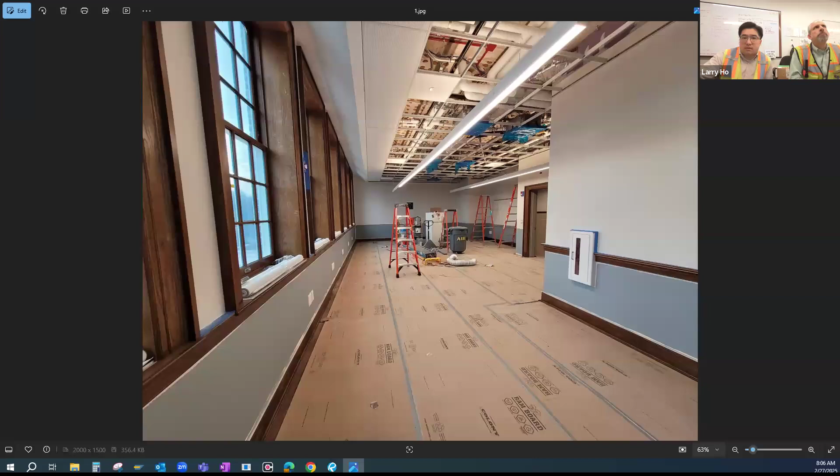Can everybody see the screen now? Yes, okay. So we're up and downstairs. Upstairs is kind of status quo, to Ty's point right now. We're just getting ready to start peeling back the protection and cleaning ourselves up upstairs, so we're not going to see any photos of the upstairs. The only change up there is that we've begun installing the ceiling tiles. We walked last Friday with the building officials, and we've agreed that we can start closing up tiles as we continue our commissioning effort throughout the building.

So we're going to look at the main and lower level outside as the main focus now. This is the conference room on the main level, the north conference room. Basically the wood trim is getting finished up, and the window treatments are getting ready to get installed. You can see them sitting on the windowsills as we're getting ready to install those. Again, we're maintaining the protection for today. Protection is going to start coming up tomorrow.

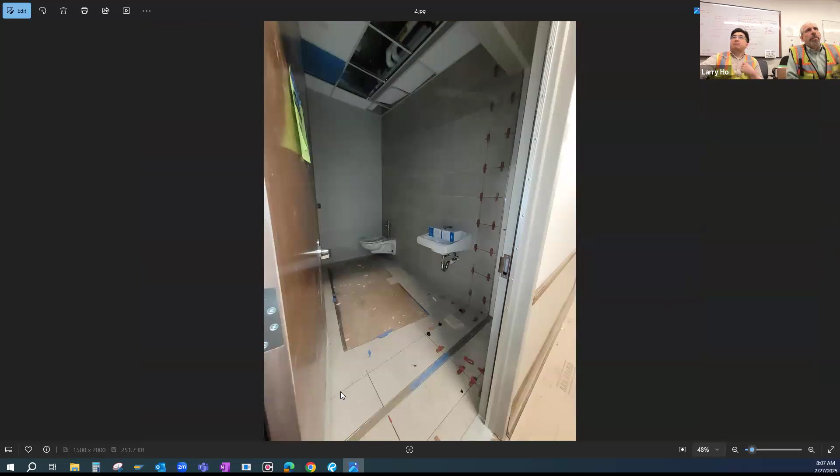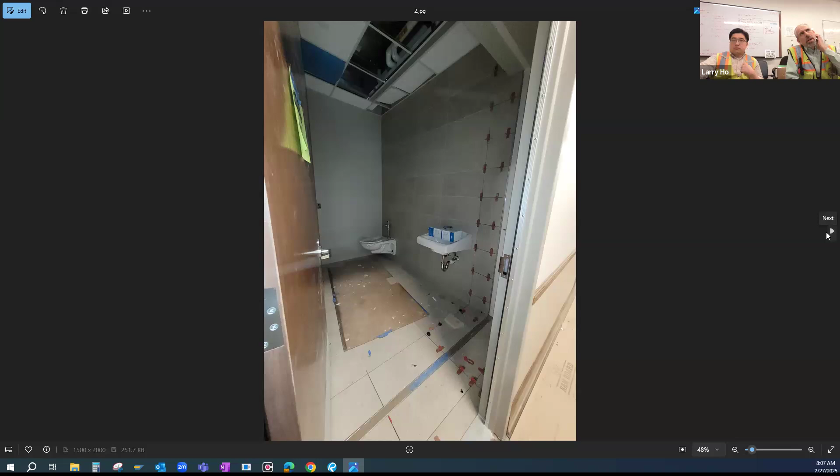This is the bathroom on the main level. We were able to manipulate a little with the expansion joints in between the two buildings, and we're able to get that all in place. That allowed us to finish up the tile, and so they're just putting the fixtures in on the main level with a little bit of grouting to do.

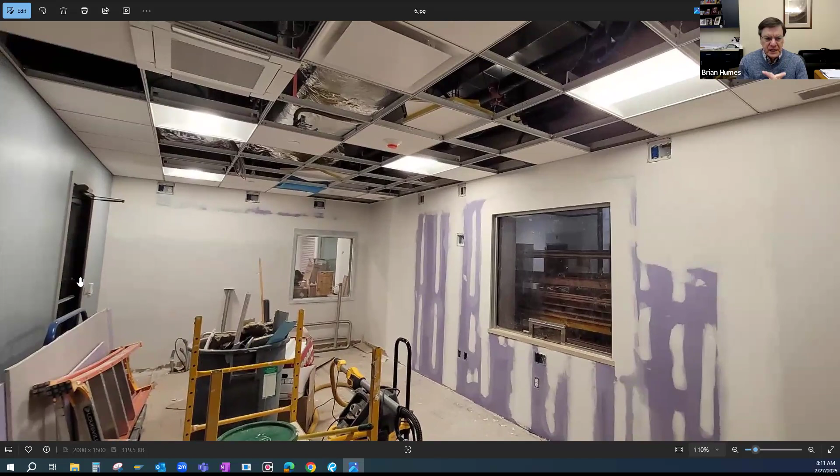We are taking the 2 aluminum doors that you see on the left side. We're taking those aluminum doors and frames out. We're replacing them with new metal frames, solid wood doors, but the dispatch side of those 2 doors will get the same wood trim as you see in the lobby.

So if you're in the lobby looking into dispatch, you'll see some wood trim into dispatch, but it's really the two doors was all. And was there anything else that we changed?

We did add some more data outlets in the room behind dispatch, that work area behind dispatch.

And did we keep or did we change the casework that was in this area? Because I know we had talked about that. There was casework that had been eliminated at the window.

We eliminated that so officers could go up to the window and the console furniture could get placed back where it wants to.

So the casework was what was deleted in this space. Brian, is there anything else we have to do so that people working in dispatch feel like they're getting a building that's as fresh and new as the rest of the police force? It will be as new: new flooring, new paint, new monitor locations. That's been coordinated with the police department. They're going to get the existing consoles back into this space, but that's the only thing coming back, the console furniture.

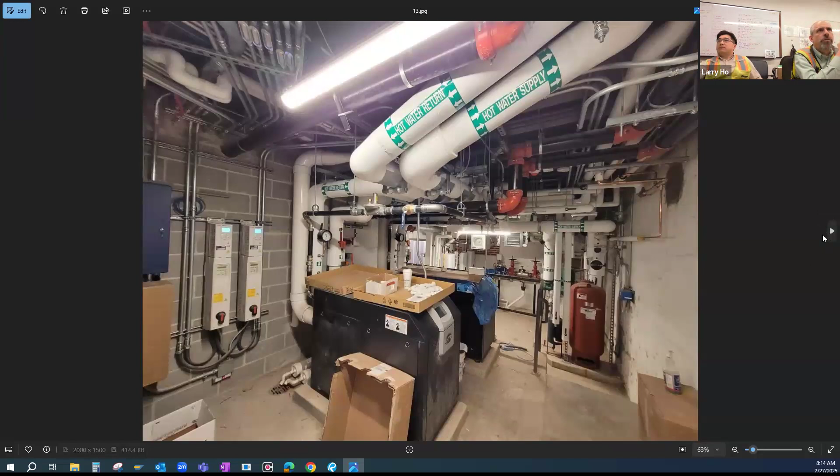The boiler room, as we're starting to neaten it up - those are the controls, the variable frequency drives, expansion tanks, boiler stuff. It's kind of back of house, but the guys did a great job. The craftsmen really took their time in here, and I wanted to show off putting 10 pounds in a 5-pound bag. So they did a great job there.

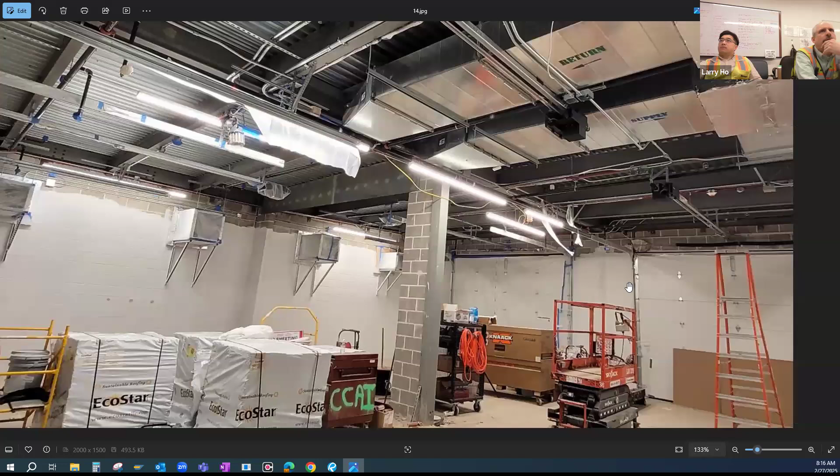And then the last little bit of ceiling and roof shingles - you can see we're down to the wire with the roof shingles, the piles are getting smaller. With the weather getting better we can get the shingles done. But everything from the exhaust fans you see in the back to the louvers, and the louvers on the right hand side for the doors - we're all ready to go there.

It was a little bit of back and forth with manufacturer challenges and trade contractor challenges, but we'll get that in time, and everybody will have that up and running.

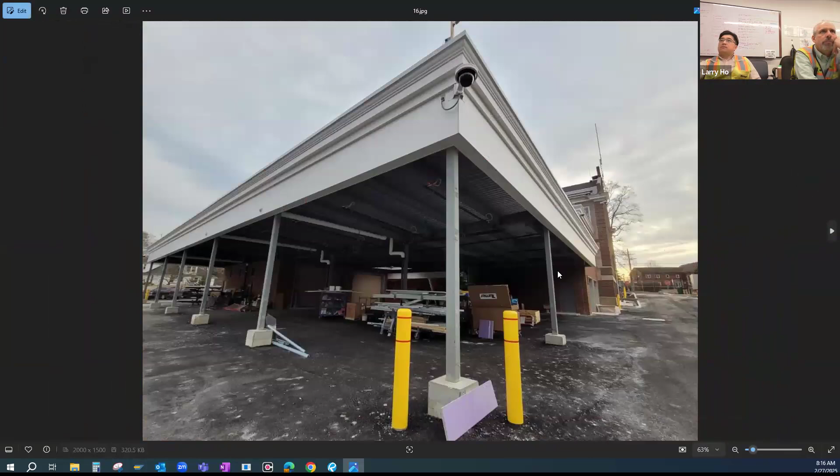The generator was started up yesterday, so it's fully functioning now. We've got one last little bit for the transfer switch ASCO team to come in and do the electrical side of it, now that we've started the generator up and ran it through its paces for 4 hours. They have a load bank that they bring out to test it, stressing the generator to its limits to make sure it's going to function when the load is on.

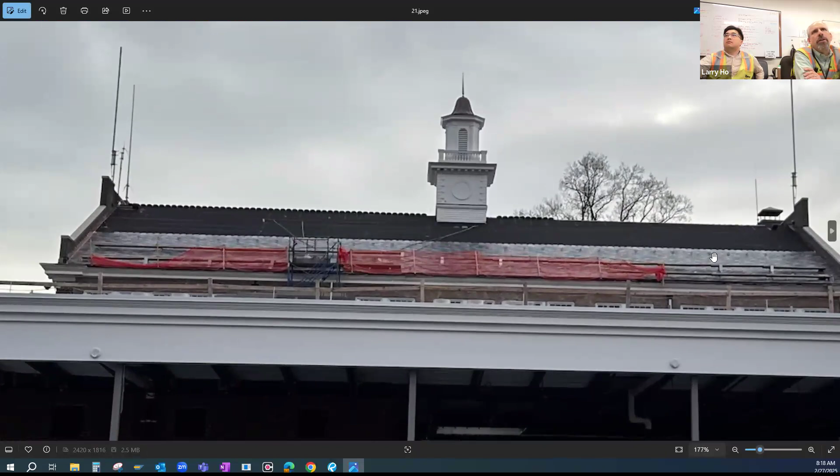From the back of the building, again, up the stairs, retaining wall, and in a little view you can kind of see where they are with the roofing. They've got about another 2, maybe 3 days to get to the top, then they'll finish the capping and wrap up the roof. So a lot of good things going on. The good weather has been helping us a little bit; the rain pokes us in the eye, but other than that, we're in good shape.

Railings are expected to come out next week for the stairs, so we'll close those up. Those were galvanized and had to go to the galvanizer, and there's a long wait on those items. But other than that, once the thaw comes, we can get back and finish up the grading, finish up the planting, etc. when springtime comes.

Looks darn good. Yeah, it looks amazing. Yeah, really does. I wonder if we could paint the clock face — we'll be right twice a day. We can, what time do you want it to say? You just got to pick a time. That's 5 o'clock, right? 5 o'clock somewhere, right?

Hey, we're gonna discuss this later, those columns you showed there, Larry — I mean, Scott. Yep, the dressing, whatever you call that. Right, so if you can look at — I apologize — you can see those are the columns there. There's the 1, 2, this might be a better view there, but you can see them, yeah, the 1, 2, 3, 4, 5, 6, and then the one 7, returns 7. But I don't know if you want to, Brian, take it.

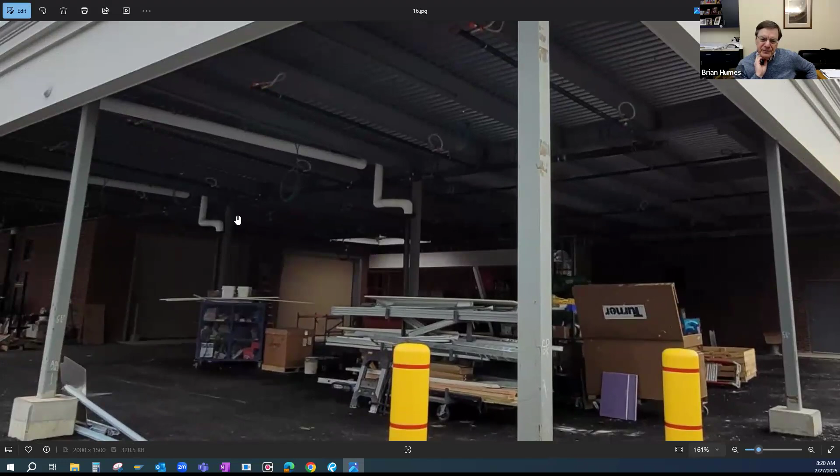We have a total of 9 columns, but 7 of them are on the perimeter, and there are 2 interior columns. The 2 interior columns you can see there have roof drainage that goes down next to them; they're interior to the space. We're going to call for those 2 interior columns to be painted and remain exposed. But the 7 on the perimeter, we've put together a sketch to add column wraps to those, and we picked a solution that I would have picked if we'd started this from the beginning. It's a Tuscan column — I can share with you what it looks like.

So Larry, you're gonna have to jump off.

As far as type of column, I would recommend, and I recommended this, the Tuscan, the second one in. It's a smooth face, it's round. It does have an appropriate curve to it.

These come in halves. They're made out of a fiberglass resin, so they're durable. They're lightweight, but they are just a covering to the structural steel. So they come in halves. You set them on the concrete base, you fasten them together, and then you bondo the seams and you paint them. So it'll be a durable product.

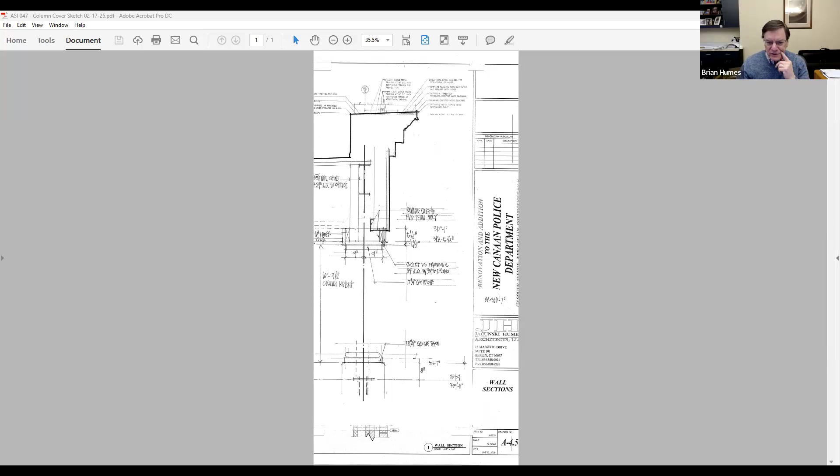The columns may take some lead time to get, but if all that ceiling work is done, the pier is already there waiting to accept them. Whenever the columns arrive, they could just assemble those around the columns, finish off the seams and paint them. So the thing that's holding up the ceiling right now is this soffit piece that we need to get priced and approved. Once that's in, it will be all set to receive the columns.

Brian, we fought so hard in the exercise room for every single inch of ceiling space. Can you talk a little bit about if we're going to drop the ceiling back here, how high it's still going to be, and whether that's still going to feel right to people using it, or if it's going to feel way too short?

Well, the key dimension is the height of the Sallyport doors. We've worked hard with the Sallyport to get the mechanicals up, so if you have an 11-foot door at the Sallyport, you can drive something that's 11 feet into the Sallyport, through it, and out the back. By lowering this 6 inches, there is some grade change that happens in this corner, but we're still maintaining that 11-foot clear dimension to the soffit.

So we have a consistent 11-foot dimension that you can take through the Sallyport, and if you can get it in the Sallyport, you can get it out and continue to drive it through. That's the critical dimension - we can't take anything higher than 11 feet into the carport or the Sallyport. All of the vehicles the police department currently has are within that 11-foot dimension, so all their vehicles can make their way through this space comfortably.

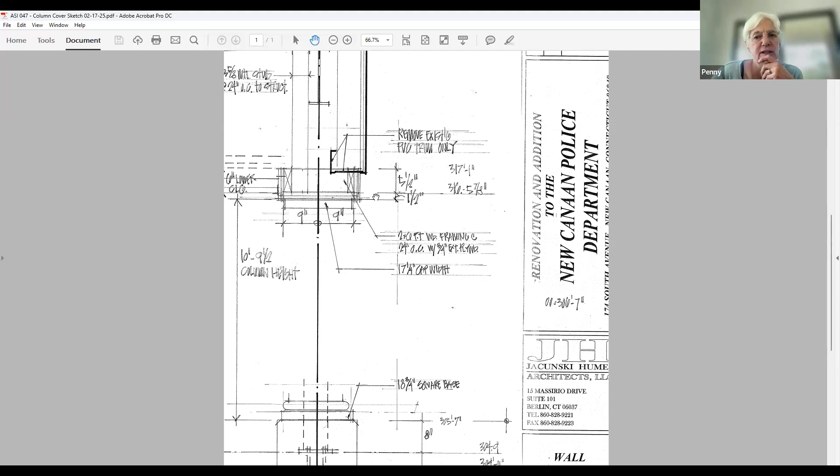Okay, and you all think that the 11 feet is going to feel - I mean, that's a big, broad expanse. It's going to be okay since you're only going in and out of the building there, but I just want to make sure you were happy with that. 11 feet then throughout that area?

Yeah, that's the dimension that we've maintained. Most of their vehicles are 8 feet and less, so you're going to have plenty of height above these vehicles. Right, and an ambulance is how tall, just in case it goes through there? Well, the overhead doors at the EMS are 11 feet also, and they're going in and out of those - all the overhead doors. Right, thanks. So the ambulance can clearly go through this.

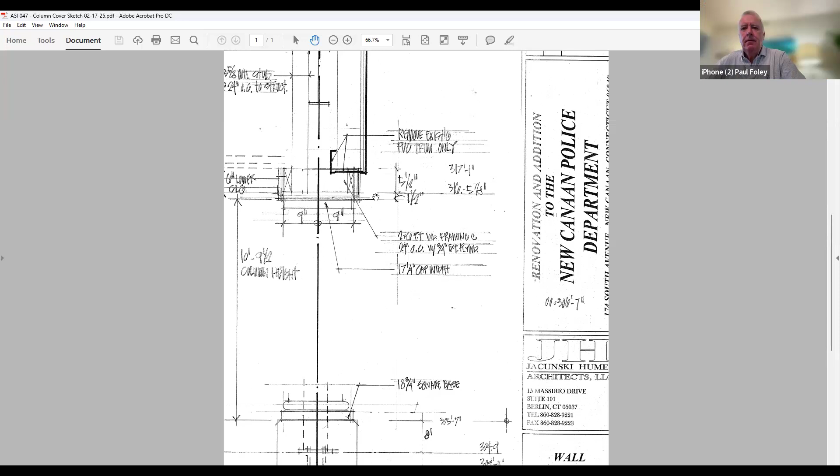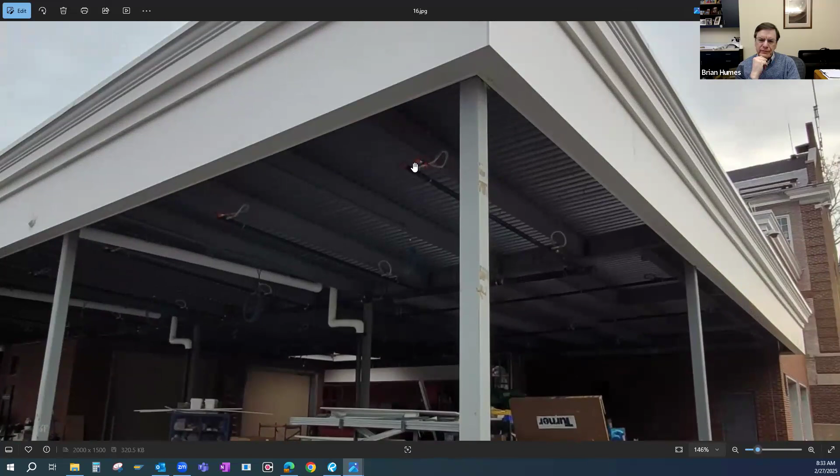Scott explained to me yesterday that ceiling is needed to make the fire protection system work—if there's a fire, you need a way to sense the temperature, and the ceiling has to be enclosed to make the fire suppression work. So it was going to be there anyway. There's suppression piping that will be concealed within the ceiling, and those little whips you see are sprinkler heads that will come down into the ceiling surface.

It'll look great. And Larry, thank you for adding that picture—it really helped for us non-builders. Yeah.

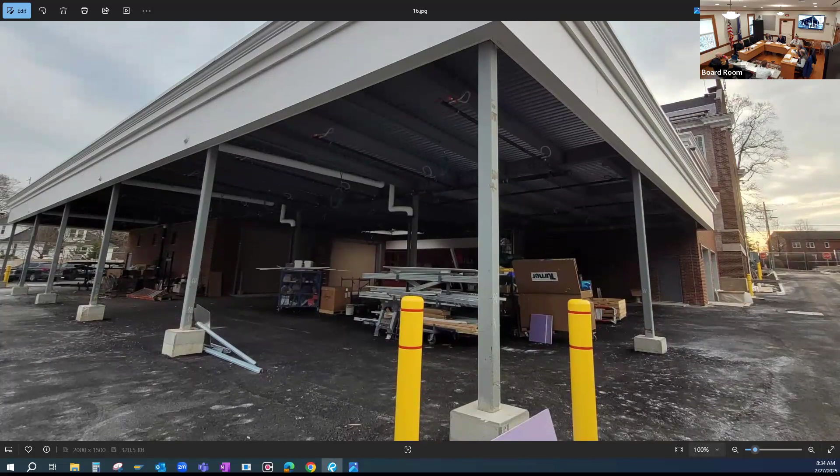So we can go to votes, or we can finish up Ty, or as part of Ty's report we can circle back to voting and understand. Yep, right, we need it, or we could do something tentative.

Okay, so we'll jump to the numbers. First page, most of this is cleanup stuff. There are a few new numbers, as we just referred to. Bottom of the first page, number 65—this was a floor drain added in the sprinkler room, and we just got the pricing from the plumber. So the work was done a while ago, but that's 6,247.

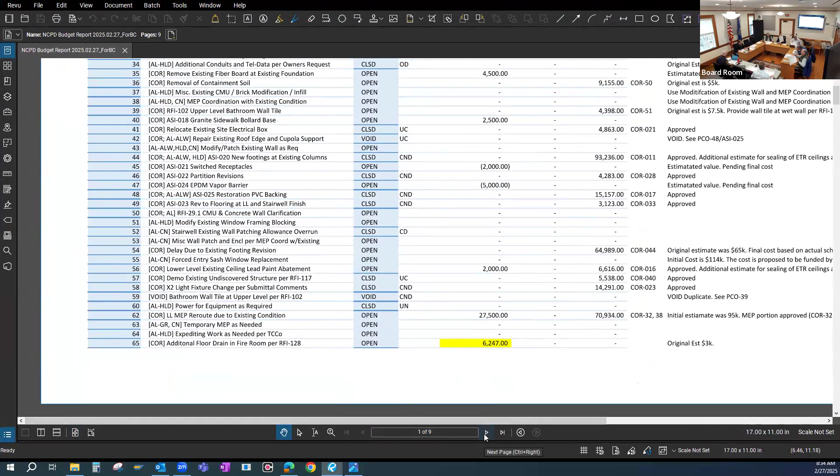Turning the page, we got the stapler in the right place this time. Number 107—we've been talking about this for a while. This is the casework locks, which was priced a little higher. We reduced the number and negotiated it down. I think everybody's on board now with the 2,177, and that'll move towards getting approved.

Down to the yellow ones at the bottom—additional soffit. This is in the corridor of the main level between the two areas; we had to widen one of the soffits to cover all the steel. So this is just an approximate value, a swag at this point. We're finalizing the numbers there for the 8,000.

The next one is what we were just talking about—this is the carport ceiling. The swag right now is about 65,000. We'd say over half of that is just the columns—it's probably a 60-40 split between the columns and the soffit, with the soffit about 40% of that.

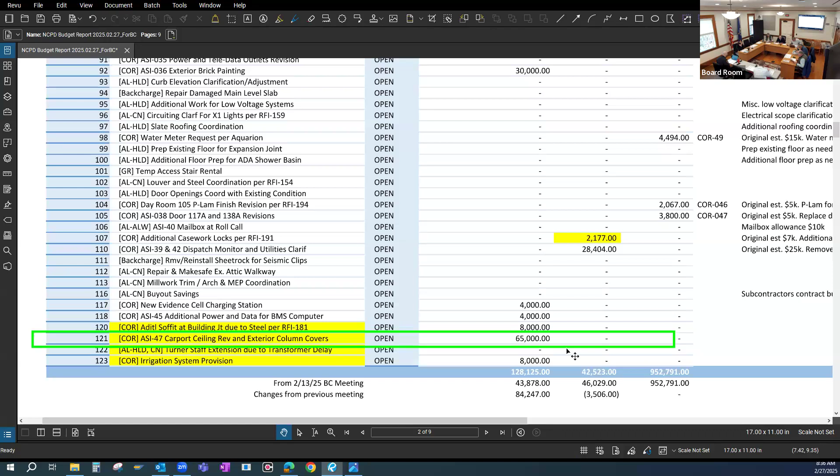Turner staff extension—we've alluded to this. We haven't finalized the numbers, but wanted to identify it. It will actually be $0 to this report, and it'll show up in the contingency or holes, funded out of one of those buckets within the GMP.

And then the last one is the irrigation system. We have to make some provisions to tie into the irrigation system that's going to be installed out of the soft costs. So that's the outside irrigation. Correct, for the plants. Yep, yep, okay.

So that's the overall PCO log, and you see at the bottom, the current numbers of changes thus far to the project. You need some approval to go forward with the soffit. Why don't we just run through overall, and then we'll double back on that? That'd be great.

On the holds, most of these are just moving things over from pending to approved. The first one is for some demo of the existing ceilings on the lower level, to make room for the MEP stuff.

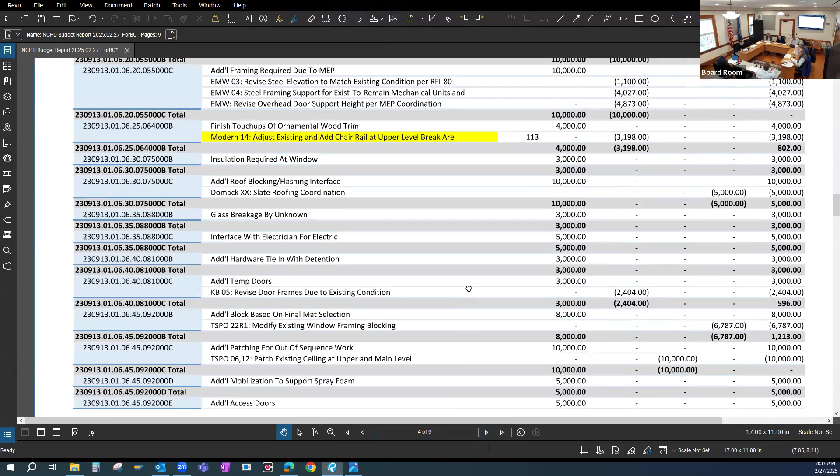Curb elevation, again this is just going from pending to approved. Some curb repairs out in the front of the building - this is work that's all been completed at this point. Next page.

This was just a little change - this is modern number 14, adjust some of the chair rail. When Brian walked through, he added some chair rail just to continue it down a little side corridor, so that it looked a little more finished. So going down into the break room, 3198.

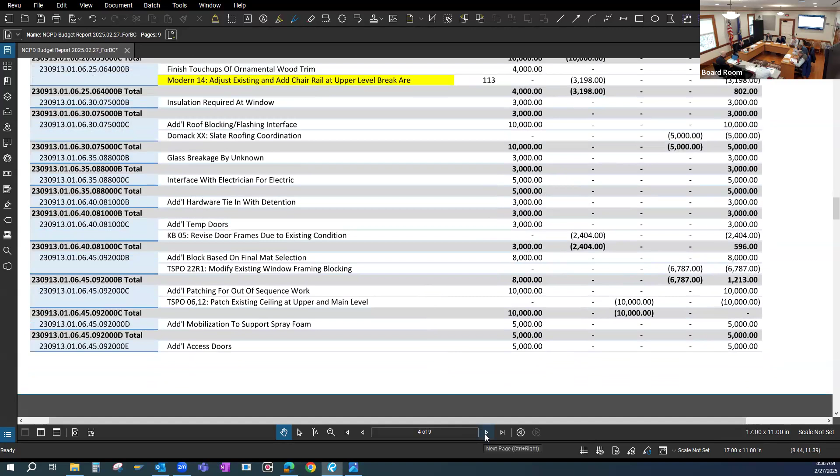Moving right along, towards the end of the holds, a few new items. Within the lobby, there was some radiant panel that had to be adjusted to make room for the crown molding. We also had to deal with a diffuser coming from the vestibule into the lobby, and so we had some adjustments there as well to the millwork. This affected a few different trades.

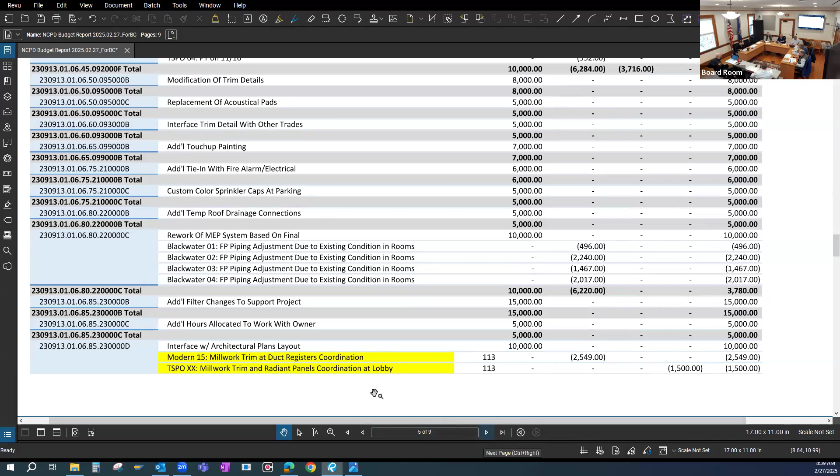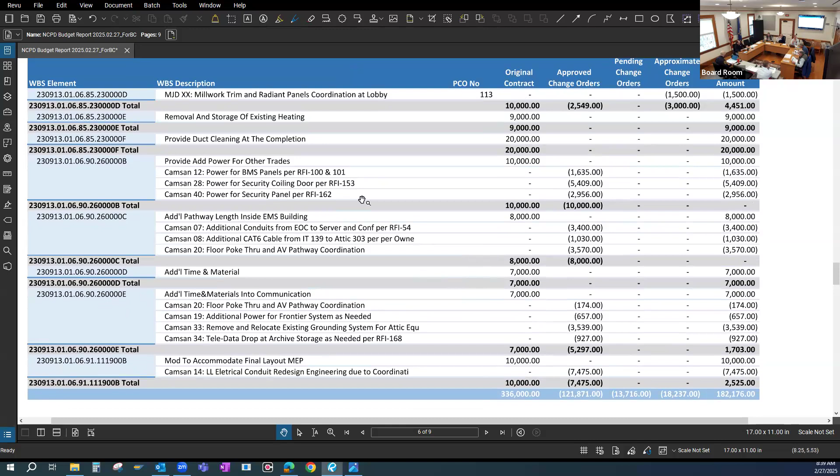The first one is the millwork, then we had some drywall work, which is the second line. And then if you go to the last page, this is the mechanical side. So three little buckets of money to make the adjustments to make that really look appropriate, and that's all coming out of our holds money that we had.

Then the allowance report - there was some storage fees associated with all the furniture for the dispatch. We took a little bit out of what was remaining in this allowance bucket, and then you'll see the rest of that is coming out of our contingency.

So right now there's still 20,000 left in the allowances. The bulk of that is for exterior masonry, 10,000. We still need to paint that, so that's primarily for that. I don't know if we'll use all of that.

And then the remaining 10,000 or so is a little bit for the gates, about $1,200, and the last one is some additional floor patching and things of that nature. But so we're kind of coming down the home stretch - I think the intent would be we'll exhaust this with change money or whatever before the end of the project.

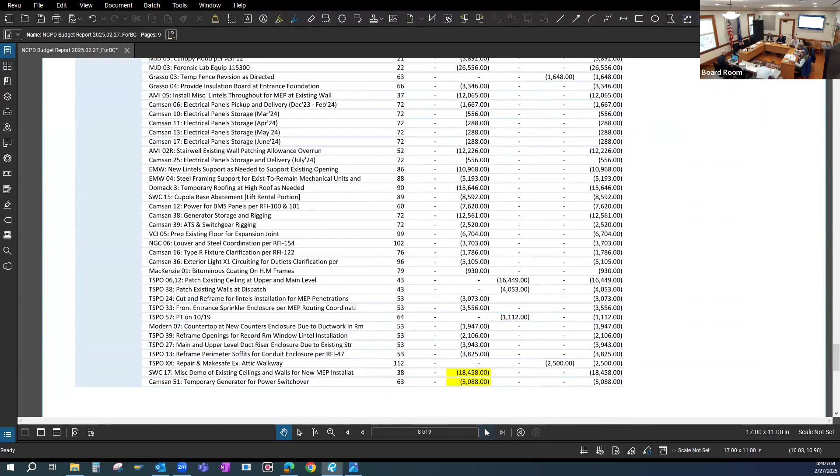Contingency, the last section - on the first page, the last two items, those are just moving from pending to approved. And then on the last page is the new stuff.

The first two items are the Xybix furniture - again that's the remainder of those storage costs. That's the dispatch furniture - it's the existing furniture that we had to pull out and store it with the manufacturer, and then they're going to bring it back in next Friday.

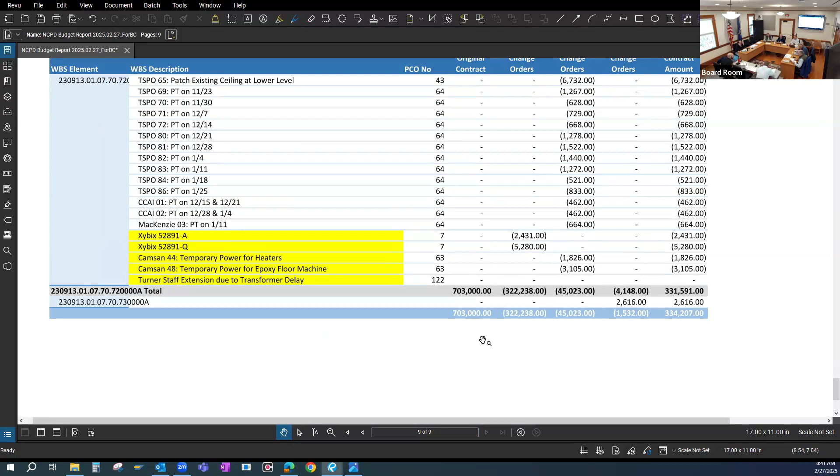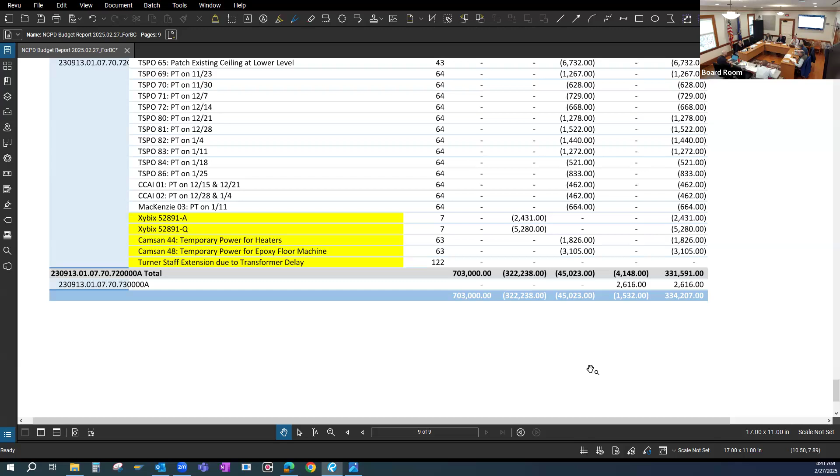And then we had some electrical work for the temporary heaters that we had to bring back in because we didn't have the power for the permanent systems. And then some also power for the temporary power for the epoxy floor machine. And then this last one is just the staff extension that I referred to.

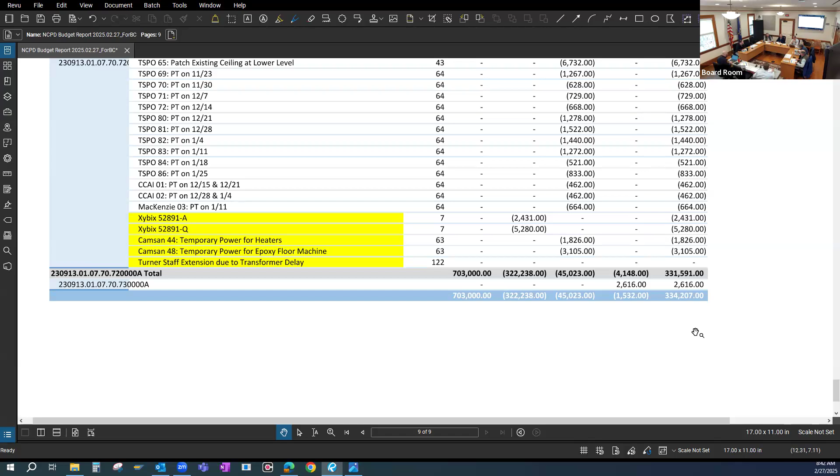So right now we're showing it in contingency. We can figure it out between contingency and holds once we zero in on that number. So that's - we still have 252 right now left in our contingency.

252, about 330. That's - yeah, 252 is... no, what I don't have is the updated one. This is the updated one? Oh yeah, I'm sorry, yeah. That's right, 330. No, this was a previous version. Oh, so it's 330. 330, correct. My bad, yep. I made all my notes on this and then Larry.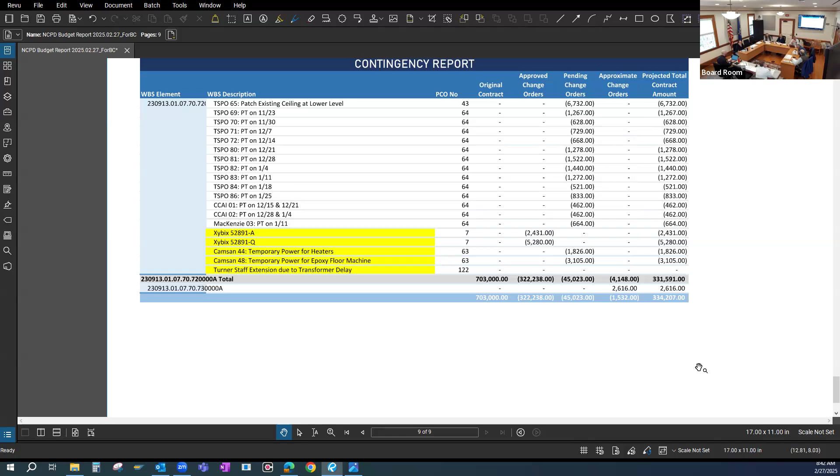Is that 330 looking like you'll be pretty good? I would say, depending on the staff change and how we distribute that, but I think on the last report I said we'd probably be closer to 250, just with little nits and gnats coming down the home stretch.

This is your contingency. That's our contingency. Right, we have the 846. That's what happens when you get Board of Finance guys on the building committee.

846? Yeah, we spoke. Just so you know, we presented to the Board of Finance on Tuesday night, and I'm not going to say they have a one-track mind, but they as they should.

Jill, how do you want to handle the approval, because the 65 grand isn't, we don't know what the number is. Jim, we could approve up to 75, and then if it blows past that, you'll have to come back to us.

So I move that we approve the column. Mike, can we have just a quick discussion? Yep. Anything over $20,000 we've been voting on. This is an optional item so we will obviously call for a vote on this particular item.

When we gave the presentation the other day to the Board of Finance, we had $60,000 included, covered in contingency for this item in the irrigation, so we included 60. This is another $13,000 on top of that. So the actual contingency is going to be drawn down from when we talked to the Board of Finance the other night by another $13,000. So it basically makes the contingency $840.

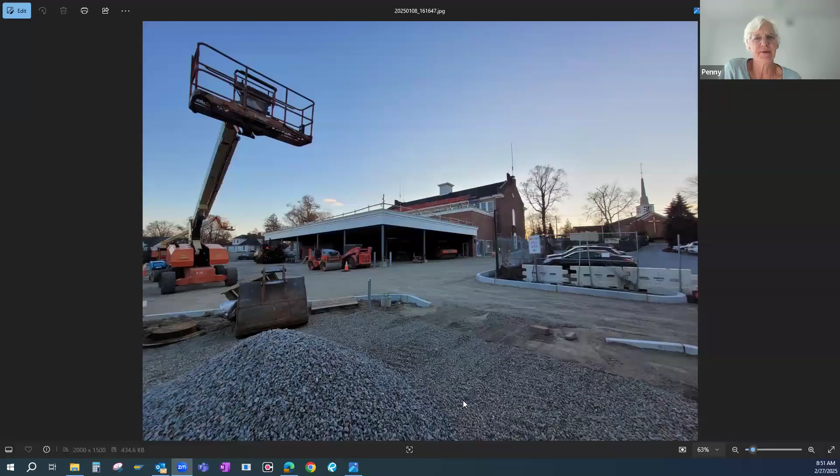That's still a concern of the EMTs. So I guess just on Brian's point, the one thing I want to make sure of is that the police department is fine with the building as is, to see if they can live with it. Because what you don't want to have happen is for them to say we needed this all along, the building committee didn't give it to us, and then because of budget constraints they put something up that looks really awful.

Where are the police on the fact that we don't have this shed? I know we talked about it a lot at the beginning of the project and we took it out, but where are we on it now? Paul, do you have any? Is John right there? John or Joe? No, Joe's here. Hey, Paul.

Hey, Joe. We did a walkthrough last week, as I said, when we had our staff meeting. Everybody loves it, the building looks fantastic. There's some minor tweaks and adjustments, we're getting those to Brian and the team. As far as that pad goes for storage, the chief, deputy chief, and I were talking about it after, and we would have use for it, but it wasn't something at the moment that felt like there's any ill sentiment about it not being there right now.

So I'll go back and talk to them after, see if there's any urgency to it, and report back. But right now it's not that big of a deal at the moment. I don't know if it really needed 20 by 20 or if it was more like 6 by 6, but let's let them come back.

And Joe, from a logistics and budgeting perspective, so Ty, you mentioned there's a punch list that's part of the construction project—there's a wall here, things like that. When it comes to changes based on police department input, day 2 as you described it, Joe, how is that handled in the budgets?

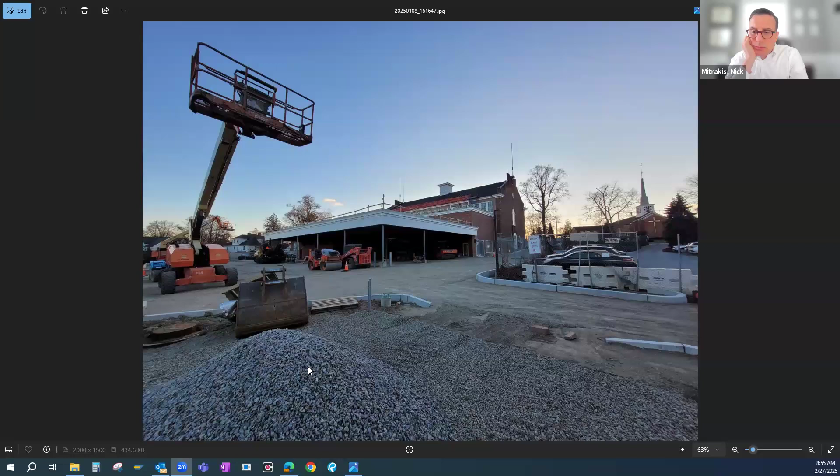So the only thing I'm thinking—sorry, this is before my time—why was the shed stricken at the time anyway? There was a shed that became a brick structure. It was a couple hundred thousand dollars, and it was cut out because it was not desired at that price point, and to keep the project within budget. There was a lot of pressure to not go over 29 million. So that was what happened. And there was a shed, but it was in a conflicting location, so it had to be taken down.

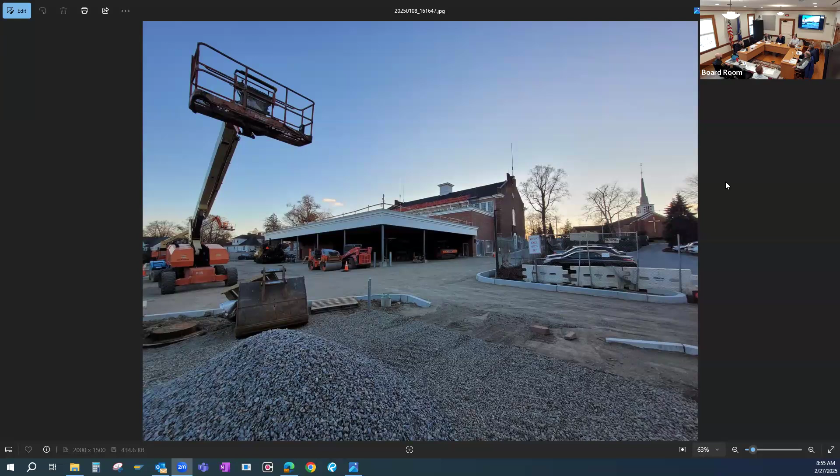So here's what I'm thinking about the shed: if we need this, this is the team that should put it in, because we know where all the conduit is, we know where all the drainage is, we know all of that. We should make a concerted effort, and if we can do it at this lower price point, it's going to be a much more efficient and better installed product than if we try to do it in 2 years when we don't have this project team.

Why don't we make it a point for the police to come back to the committee in the next 2 weeks, after giving it a little more thought, and come back either up or down on what our real needs are, rather than just postponing it. Yeah, I agree with you—let's do it now. I agree. Now that they've seen the whole building, they really understand what they're getting for storage and what they're not getting.

Right, Joe, what are we doing now with storage of things like that? They were in Fred's garage, most of the stuff was in there. That would occupy a shed, whether it's barricades, stop signs, portable stop signs, stanchions, things like that. Depending on the size of the shed, we talked about putting our, what do you call that thing, the gator, some other equipment would take up garage space, but doesn't necessarily need to be in the garage.